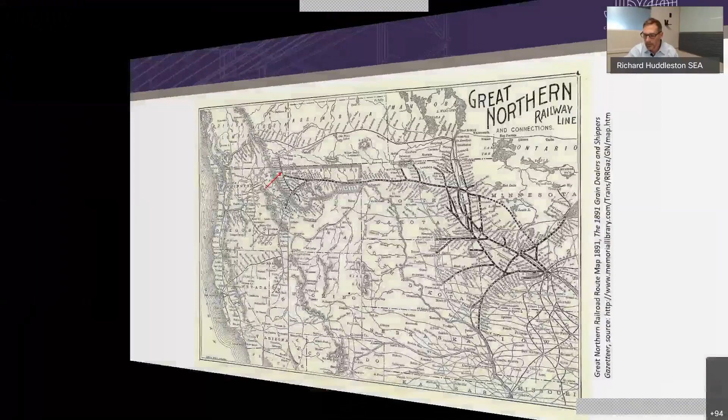Glacier National Park is in the northwest corner of Montana. It's on the east side where it's sparsely populated, and very close to the Canadian border. I remember being up there and the only thing I could get on the radio was hockey games. And the big acreage to the east of the park is the Blackfeet Nation, the Blackfeet Indian Reservation.

Within the park, Many Glacier is on the east side, which sees many fewer tourists than the west side does. The yellow line bisecting the park in two is the Continental Divide.

One can get there over the Going to the Sun Road, which is very much like Trail Ridge Road. It's not for the faint of heart. Or one can drive around the park to the south and enter from the east side, which is what we normally did because we were doing our site visits in the shoulder season. The hotel's at about 4,900 feet, and Logan Pass at the top of the divide is 6,600 feet.

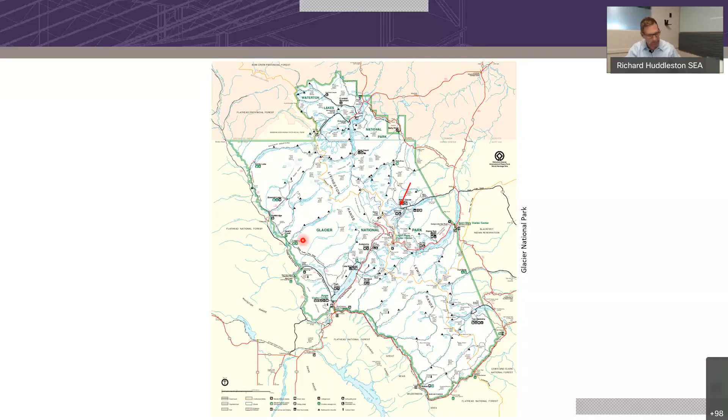Hang on, things are popping up on the screen.

Here's a plan view to get the engineers oriented. North is to the left, and the kitchen and dining, employee areas, and the shops are on the left. Can you all see my mouse? Okay.

In the middle in beige, the T-shaped section is Annex 1. The iconic lobby is just to the south of the annex, and then on the far south end is the second guest room wing, called Annex 2. The lake is to the west or south, and the hillside goes up to the east.

The hotel is about 140,000 square feet. It's timber, log, dimension wood framing, and the foundations and chimneys are stone masonry. Most parts of the building are 4 stories with a fifth walkout level at the basement on the lakeside. And there's balconies on all sides of the hotel.

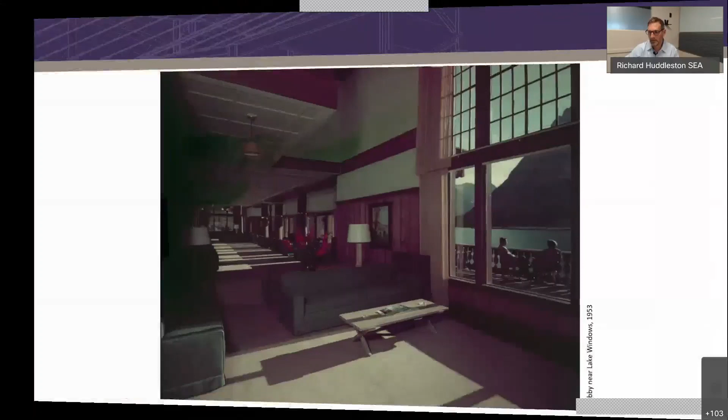And then here's the lobby. It's a 4-story space with an atrium. Those logs travel from the roof framing all the way into the basement, which is below the level you're seeing. Here's another look at the lobby. At some point in the 50s it was updated, it kind of reminds me of a set for a Sean Connery, James Bond type movie.

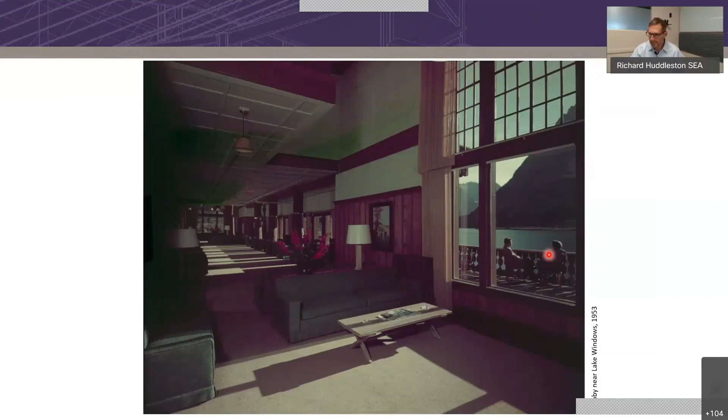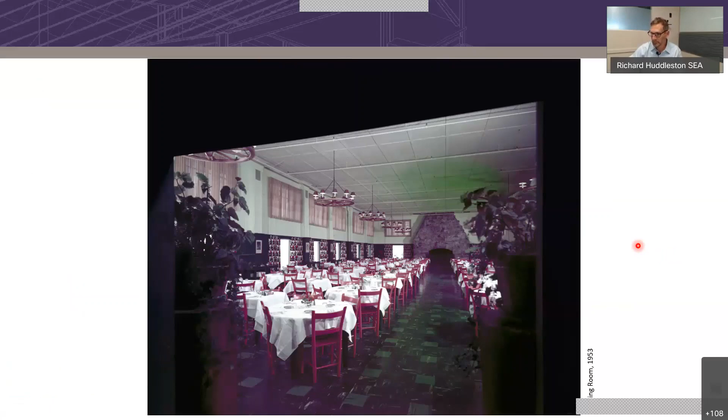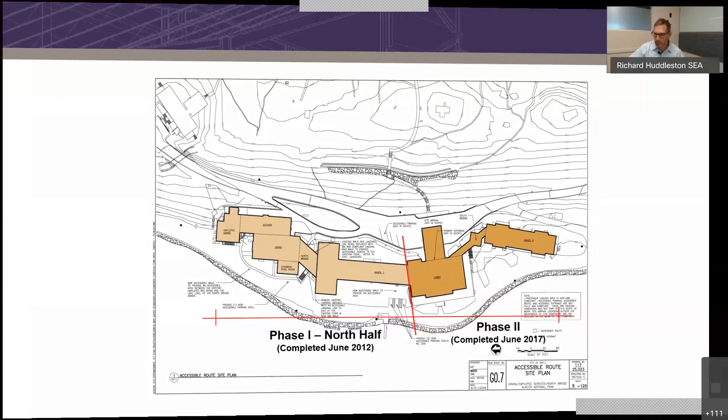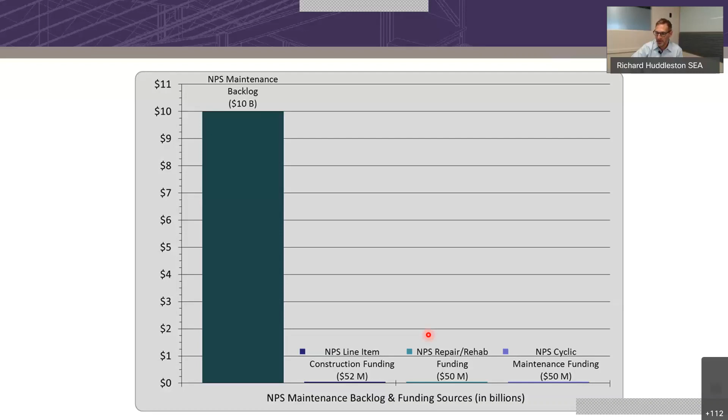This is a great slide. This particular graphic is probably 10 years old, but it's staggering. The backlog in the Park Service is about $10 billion. The available funding per year is on the order of 150 million. So it's not that easy to get funding for a project like this. There's great buildings like the Many Glacier Hotel in many of the parks. Many of them need help, and for that reason, sometimes these projects are phased and they move a little bit slower than you might be used to.

So the whole design team was led by Anderson Hallas, and they worked with the park, and the park worked with the people in Washington to make a case to get this project off the ground. The trick of it, and it was a great idea, was it was positioned as a life safety project, and that helped prioritize it higher than other projects in the queue. Once it gained attention and was going to be funded for these serious life safety issues - the faulty knob and tube wiring, the structural issues, dead-end corridors, fire suppression - those kinds of things, Anderson Hallas said, oh by the way, when we do all this work, let's reinstate all the historic finishes that were lost over the years.

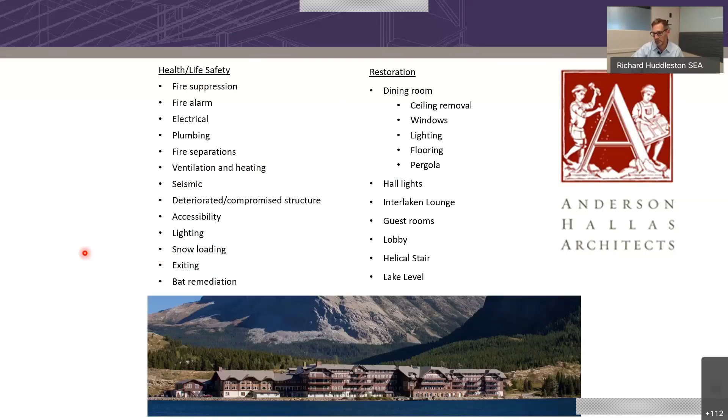Here's some more slides we'll go through pretty quickly. These were all something we thought about as we did the design, prepared the drawings. It's not quite like a normal project because of the handful of constraints.

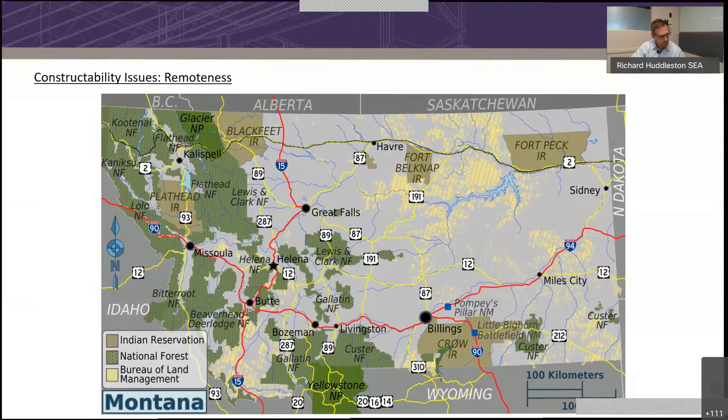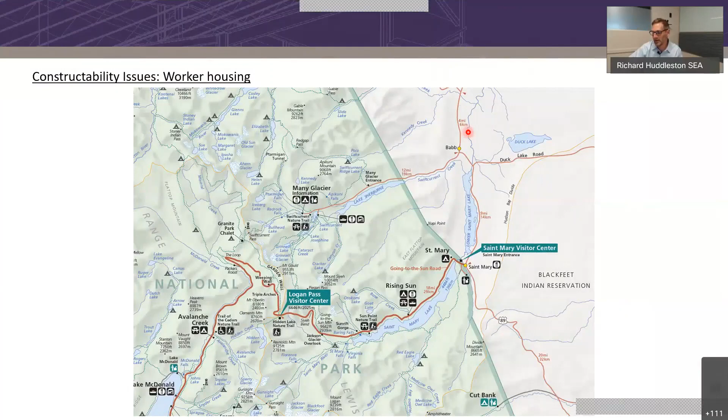We talked about the location before - up here, right near Canada, about 3 hours from Kalispell and 3 hours from Great Falls, which are the biggest cities where you can get supplies and labor. The reservation here is just outside the park. This entire area is very sparsely populated, limited housing, hardly any hotels. Most of the construction crew either had a long commute or they stayed in trailers around Babb.

The park snowed in during the winter, and it's also closed. This part of the park is closed for wildlife migration—there are wolverines that travel from Canada and pass through right near Swiftcurrent Lake.

I don't think I've mentioned it yet, but the hotel was open the entire time we did the project. I should say it was open during its normal guest season, which is in the summer.

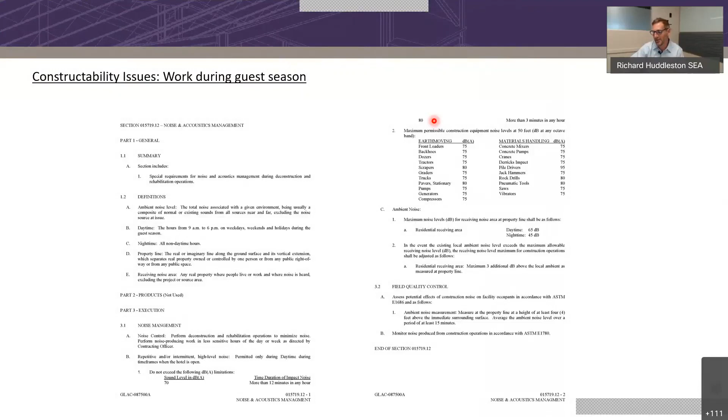This is a snapshot out of the spec book defining the types of noises affiliated with construction, like backhoes and jackhammers, and it states an allowable decibel level for those activities, whether day or night.

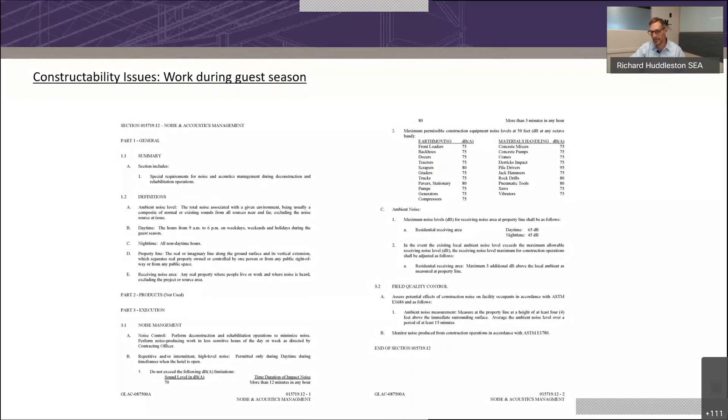Each construction phase of the project required a new drawing sheet in terms of staging, parking, and whatnot for construction.

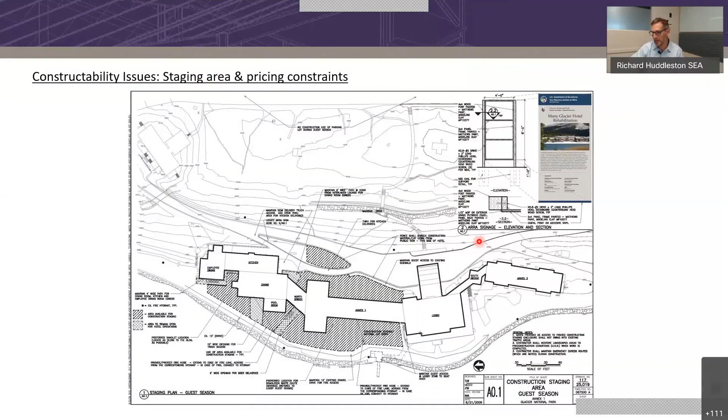Okay, here we go. Three things we're looking at: deteriorated gravity systems, overstressed gravity systems, and the lateral force system. These are sort of miniature case studies, so to speak, as we continue in the presentation.

I'm going a little quickly because I see I'm taking a lot of time.

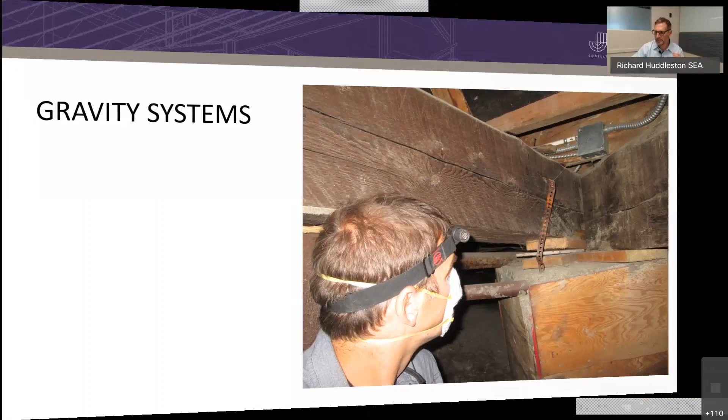One of the biggest deterioration issues was deteriorated basement level floor framing. It was a walkout basement, remember, and snow melt was running under the building. It was a very shallow crawl space. Over the years, as systems were replaced, there were lots of notched joists and studs, that sort of thing.

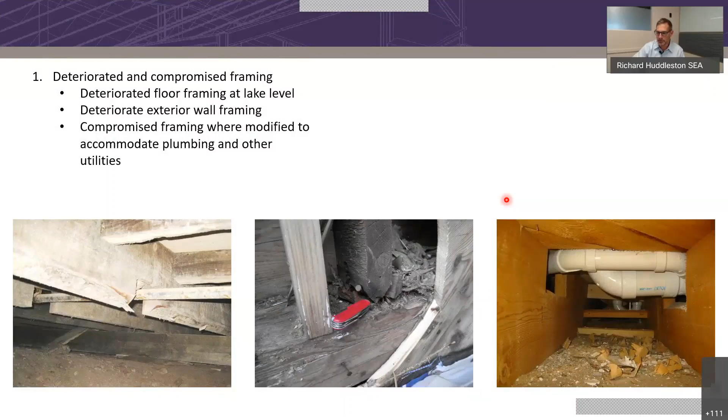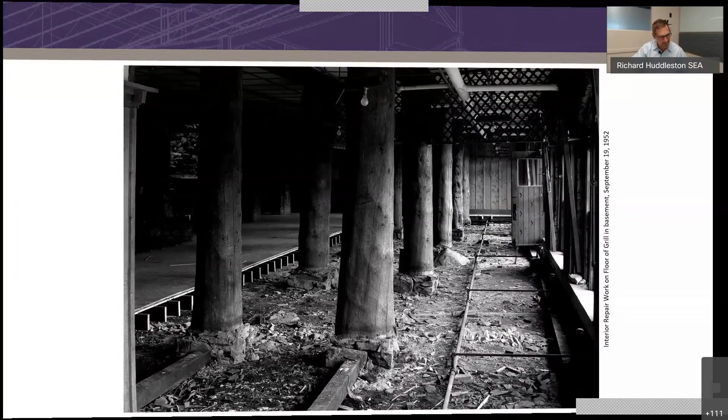We had some pictures that helped us decide where to look. These are the types of things we found—soils that had migrated in the crawl space. You can see that that's a broken girder.

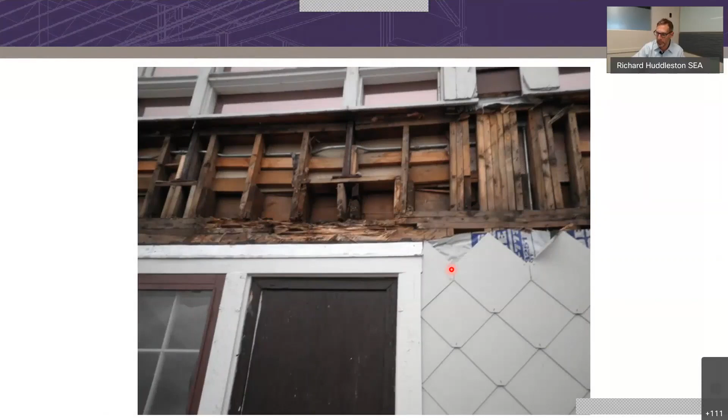This was a sort of unpredicted discovery, deteriorated wall framing. We thought that was covered in the previous siding project.

Once we had a handle on the issues, we had to come up with the repairs, and there were two types, so condition specific. This is one particular beam—if you can see the belly in it, and some dry rot at the end. So we sistered it up, epoxied the end, and put a prop in.

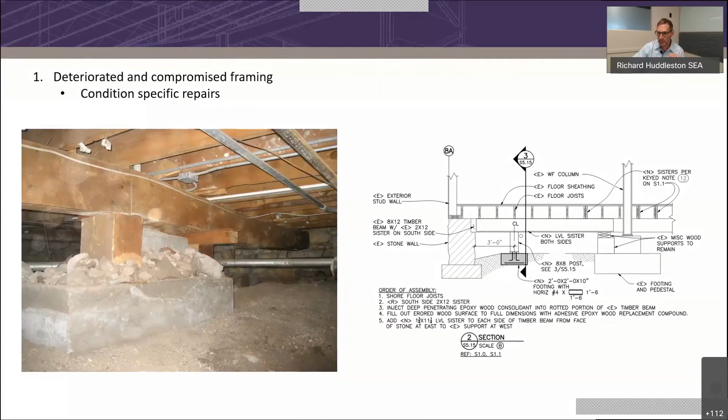A lot of our gravity work was more prescriptive, so we gave guidelines to the contractor on how to deal with notched framing—what requires headers, what requires sisters, what requires replacements.

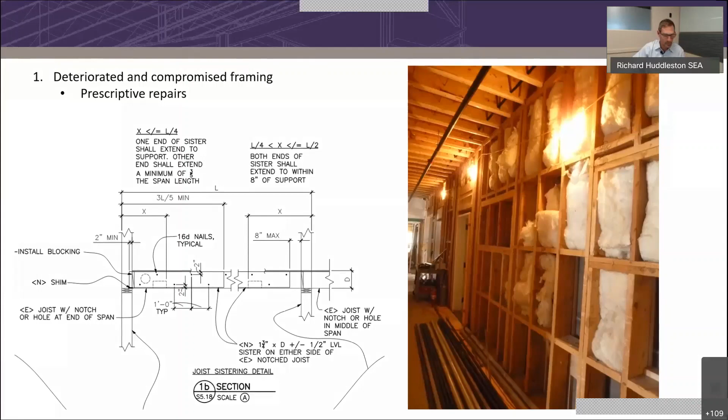We also made a plan for all the new utilities. In this particular photo, we've got furring strips where the electricals run, plumbing going through the acceptable holes in joists, and the fire suppression was dropped below the ceilings.

These stud packs, and even the mullions, were significantly undersized for wind loading.

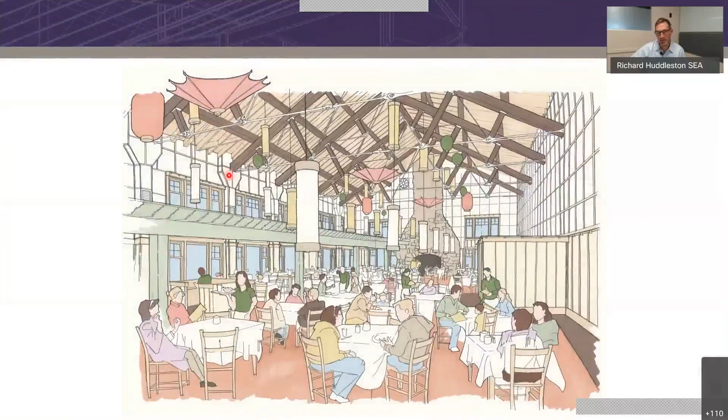So here's that dining room again—this is what it looked like when we started the project. This was the vision that Anderson Hallas came up with. This is what we had in terms of existing documentation.

In terms of the roof framing for this particular part of the building, the trusses calced out, and all we really did was add intermediate purlins between the existing purlins.

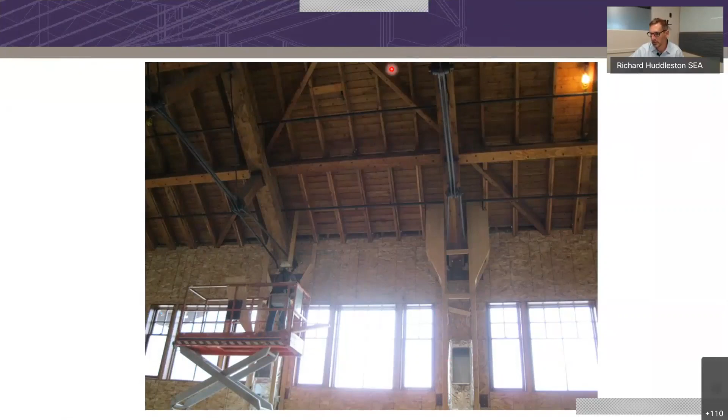Here's the dining room when it was all done on the outside, and this very much resembles the historic photo, if you remember from the very beginning.

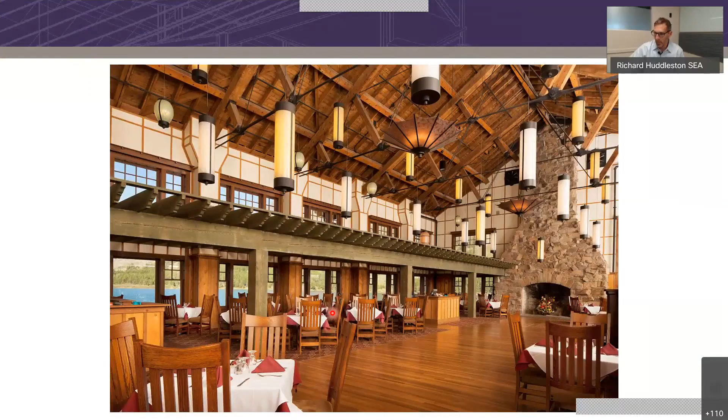Here's another case study related to the gravity system. And I should mention the design load too. There's no building department to call and ask what the snow load is, so the National Park Service had done a snow study for the park and indicated a ground snow load of 180. By the time we took the reductions for slope, and we actually had a lower importance factor because the building's unoccupied in the winter, it was around 130 pounds a square foot. This tied and propped rafter system didn't figure, so we added some additional props down to our bearing walls.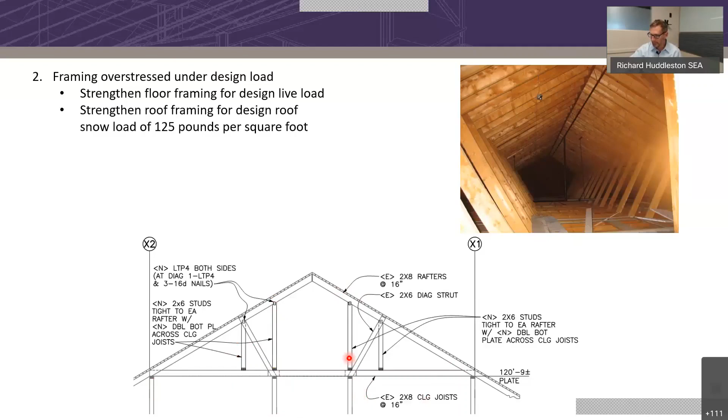And this is what it looked like when we were done. You'll see later that the corridor wall was a shear wall, so we're extending those shear walls up to the roof diaphragm to pick up load. Here's a collector in the area on the outboard of the shear wall.

I hope I'm not going too fast, everyone. I just want to make sure we have time for Brett's part, which is really interesting.

So Irina asked that we talk a little bit about code compliance, and I thought maybe we'd pause here before we switch from the gravity system to the lateral system and just talk a little bit about code compliance for this project.

There's a few points I wanted to make. The first is with the National Park Service, the authority having jurisdiction is actually the U.S. government, and the Park Service has structural engineers on staff. So along the way, we're collaborating with the Park Service on what the appropriate loads are and what the appropriate approaches are, and what the right code interpretations are.

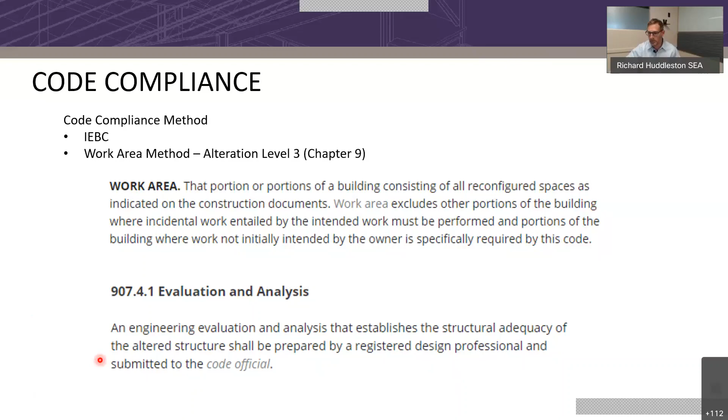Okay, bear with me, another one of those things popped up. I'm going to do what Richard showed me. Here we go. Getting the hang of it.

A few more points about code compliance. I think the park's perspective was this: it was basically a once-in-a-lifetime project, they were putting a lot of money into it, and in a lot of ways it was a gut. A lot of the finishes were moved, so they'd asked that we bring all the systems up to current code. And by and large, that's what we did.

There was an exception, and that was the lateral system for the lobby. It has an open floor plan, and it's an iconic, almost sacred space, where we couldn't put frames. So the only way we could really get there was to use 75% of the lateral forces, which is permissible per the IEBC in the case where it's a voluntary seismic upgrade.

And then for whatever young engineers are on the call today, I thought it'd be worth pointing out my perspective, which is this: I think the right thing to do is figure out what the building's doing and what it needs, come up with the right answer, and then look to the code to see how you can make that judgment work and be code compliant.

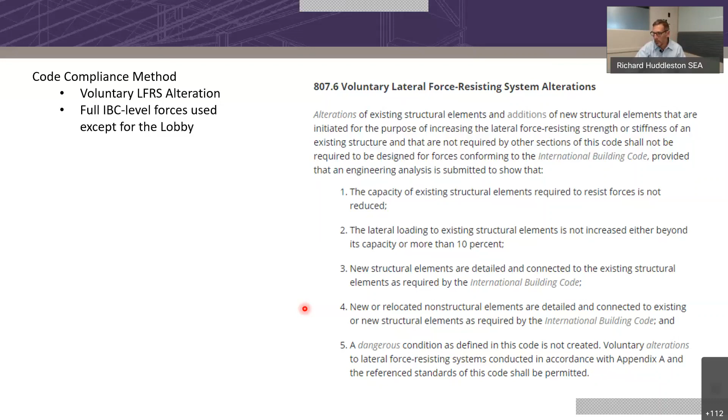Okay, here's the introduction to the lateral system part of it. And this was probably 75% of our work, if not more. We treated each section of the building separately, and that was really just due to the fact that they were all built differently.

An interesting thing in the guest rooms was there was a number of partitions that roughly stacked from floor to floor. But they were surfaced with something called Sacket board, which was a precursor to gypsum board. We did some research on that material and learned that it was brittle and failed quickly, not with ductility. Then during some of our probing and investigation, we learned that those walls in the guest rooms actually didn't stack exactly from floor to floor—they were just roughly stacked. So it became a challenge to justify what was there.

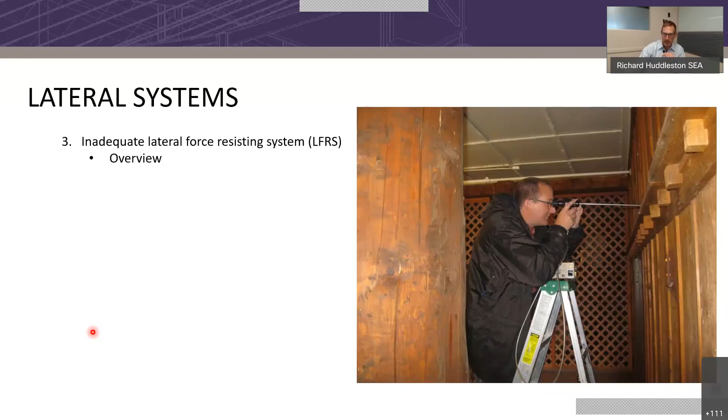And you'll see we introduced a new lateral system.

Here's a couple facts that are interesting. So just on the north half of the building, the first phase, we introduced a total of 22 new lines of resistance, or shear walls, or frames, because everything that was there originally was not specifically designed for that purpose. Again, it was empirical. And then to put another point of perspective, this chimney is about 50 feet tall and weighs close to 500,000 pounds. So if you do the math on the seismic, it's pretty big forces we were dealing with.

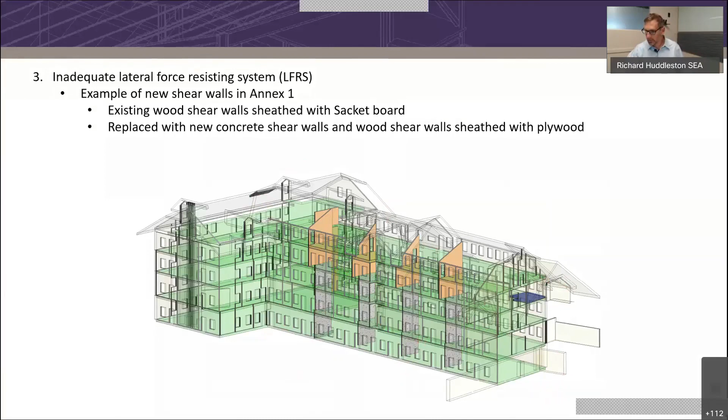This particular section was actually governed by wind. It's all wood framed and it doesn't have much masonry. But what we found was quite a bit of load accumulates in a 5-story building, and our aspect ratios were fairly unfavorable. So here are these 4 walls in the plan view.

And then we strengthened from the inside on the end wall. And then the corridor wall became our shear wall. And then we gave some credit to the exterior walls that had diagonal sheathing on them.

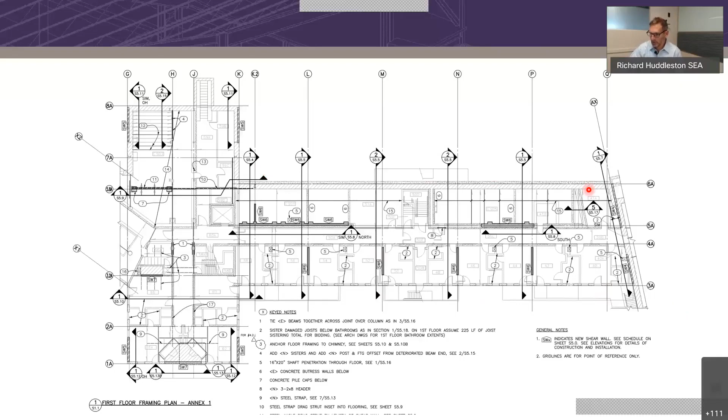And a previous emergency stabilization measure had put these retaining walls in, and then there's some counterforts here that really made it hard for us to get shear walls on this side of the corridor. It was just too congested in this crawl space.

So we picked the far side. There's a doorway, and then we have a lot of utilities running through this little gap between the end of the shear wall and the corridor wall.

Lo and behold, we could only get the upper stories to work in wood, and then we transitioned to reinforced concrete. It's like a 5 or 6 to 1 aspect ratio. And then, as you'd imagine, the tension forces get pretty big at the bottom.

So for this wing, we're using micropiles to resolve the tension loads at the end of our shear wall.

Even the wood shear walls have some hardware that's a little bit more than I was ever used to dealing with. Some of these are double 6x6 studs with the Simpson high strength anchor rods that tie full height.

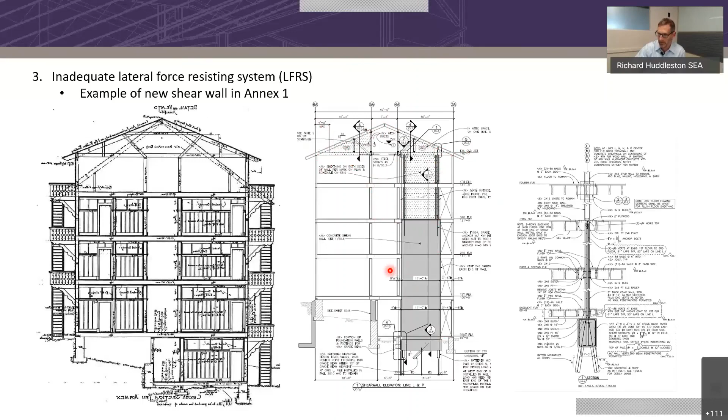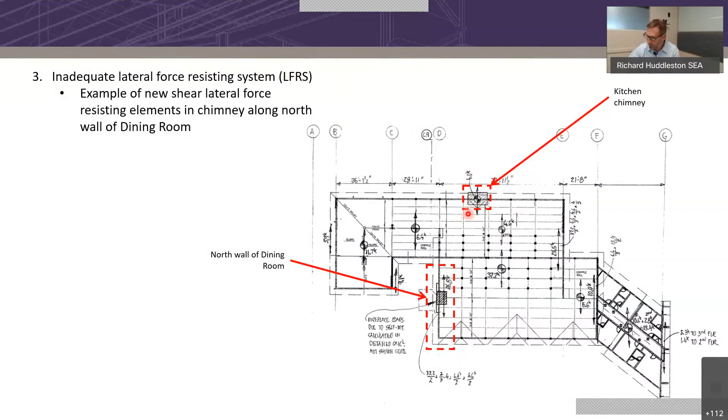This shed was removed so that visitors could see the chimney from top to bottom. Here's one of the two flues in that chimney.

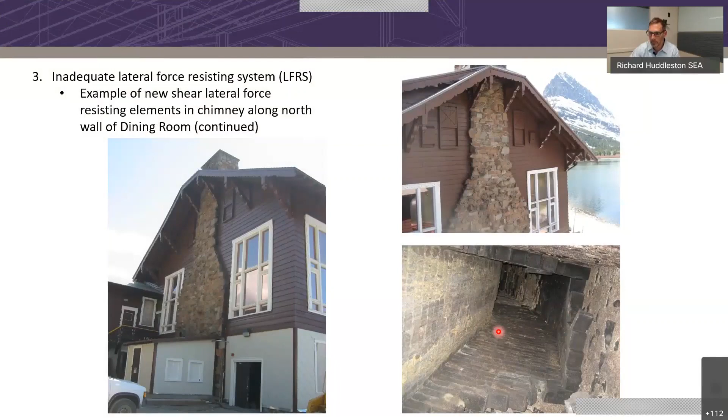Here's what it looks like in the existing drawing, and here's what Dan came up with. This flue served an abandoned boiler in the lower level, which is where the shop was, and the dining room is up here. Of course, everyone wanted to keep this flue operational for the guest experience.

So this flue was abandoned and recruited to be part of our lateral system. It's reinforced and grouted. There's some stone demo to access the opening, and on the opposing side, the stones were labeled and deconstructed.

Then this reinforced concrete shoulder and chord was installed, and it was refaced with stone. So in terms of the lateral system, this became a shear wall in plane, and out of plane where it's much more slender. The diaphragms collect the load and distribute it downstream to other shear walls.

This is a duplicate, but this is more of that strengthening work around the windows.

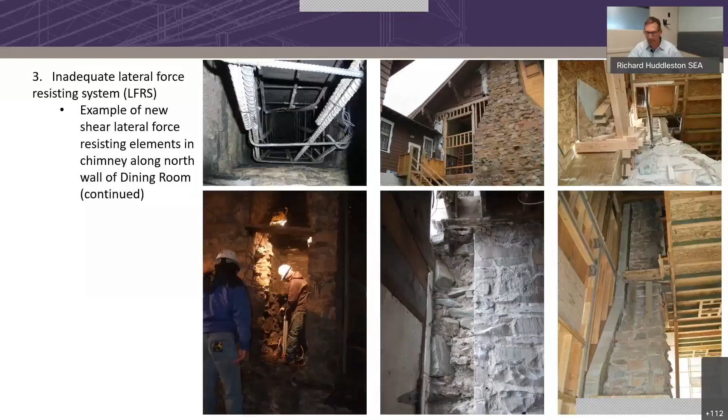There's plumbing and utilities everywhere in this hotel, and while they were mostly being removed, they were in the way of assessing things. A lot of the framing had been modified because of them, and in the new design we had to find chases for all these things. These are the reframed exterior balconies I mentioned before. This is a stone masonry chimney that was shotcreted, yet another interference to deal with.

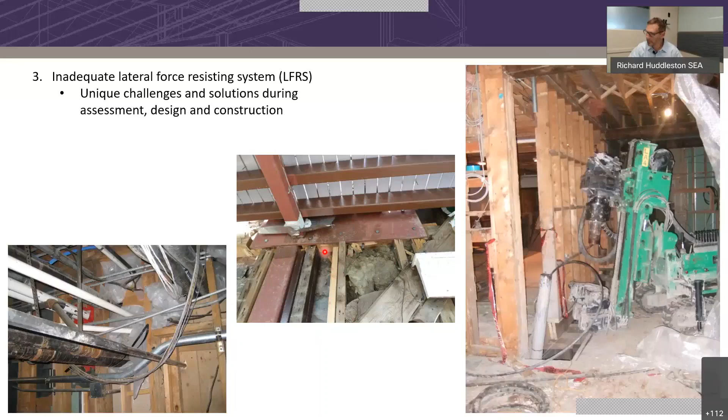I think that's it for me, and next up is Brett.

Thanks for bearing with me. I was a little bit nervous, but I'm feeling better now. And then when Brett's done, I'll come back and wrap it up, and then we'll do questions. Yeah, okay.

All right, thanks, Ian. As I'm sure you can see, he's the brains behind the operation, really. He's been involved from the beginning due to retirements and some of the senior guys going on strike in that first phase. They needed replacement engineers, so that's kind of what I am, the scab engineer.

He tempted me in with promises of these amazing site visits, you know, pristine, beautiful environment. He followed through 100% on that. It is really an amazing place, an amazing location, and it's beautiful that it got saved. He did not mention that they turn off all the plumbing in the winter when we were there doing our site visits, so the nearest toilet was a vault toilet, a quarter-mile or so away across very cold, mountain goat infested parking lots. But I've forgiven him for that.

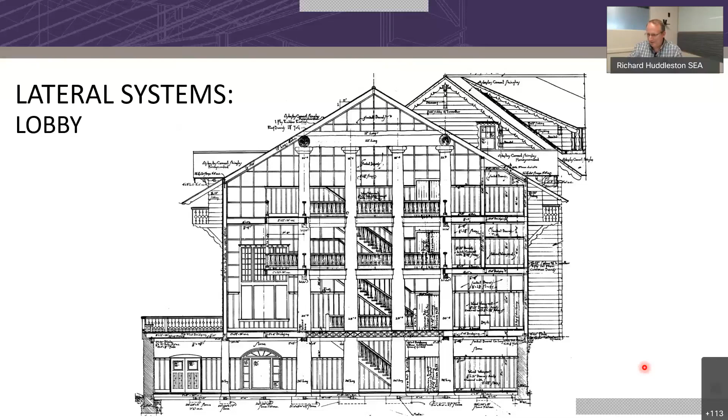So I'm going to go to the next slide, which is a cross-section roughly through the same area that we did after I got involved, and you can kind of see some of the difficulties. The big atrium in the middle was laterally very difficult. Shear walls, or walls we could use as shear walls, coming down to joists. Even the exterior of the building on two of the sides didn't go all the way to foundation; it came down to rows of log columns.

As Ian mentioned, we were working with 180 PSF ground snow load, seismic design category C. I'm not aware of any earthquakes in the vicinity of Many Glacier, but there have been on the west side of the park. In 2017, there was a 5.8 magnitude. So even though it hasn't hit there, it is a real concern and a real issue.

You can see, similar to what Ian was saying earlier, that we have a lake level down here, basically a walkout basement retaining on the mountainside and then opening out to Swiftcurrent Lake. And then there's the lobby level, which is really open.

Not a lot of walls, not a lot of continuity there for us. There's two full levels of guest rooms, and then there's a fourth level in a couple locations of small staff rooms, tucked up into the rafters. And then, of course, the roof, which was talked about earlier and will be discussed a bit later.

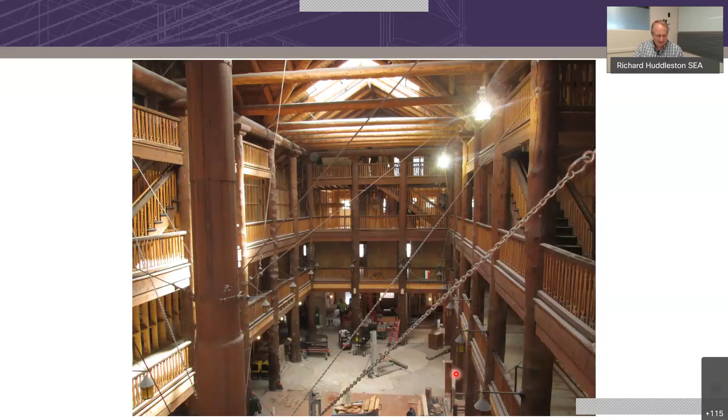And when we built this model and started running it, honestly, it didn't run well with existing loads. There were instabilities, deflection problems, and members, especially in the floor framing, that were just overstressed and didn't have capacity for modern design codes. And the renovation in the 1950s really didn't help—it made things worse.

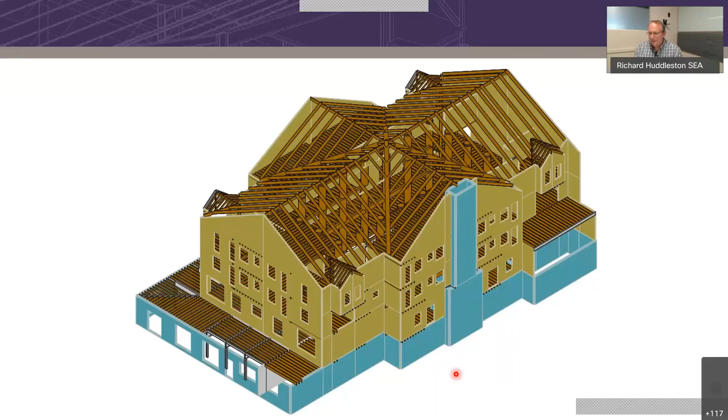And as mentioned, there really wasn't a discernible lateral system design. It was empirical, and even empirically it had some challenges. I'm guessing it's been close to that 180 PSF ground snow load multiple times during the park's history—you've seen the pictures of the building retaining snow. Likewise, it's probably been pretty close to its wind loads and it hasn't fallen down, so there's some redundancy there. We couldn't get it to calculate cleanly, so there's no doubt some structural help from pipes, ducts, and conduit in the building.

So our primary focus was to strengthen the lateral system. At the same time, we took care of a lot of the life safety things for gravity loads, but the primary focus was the lateral system. And everything was negotiated—there wasn't a lot that was permitted by the combination of the National Park Service, the architect, the State Historic Preservation Officer, and also the budget.

I know a similarly constructed project at Yellowstone several years ago, with a bigger budget and granted higher seismicity, actually shored up the building, took out the logs, hollowed them out, and used those to clad a structural steel moment frame system—but that just wasn't in reach for us. So in the end, for the lateral system, it wasn't about getting it to current code, it was about what we could get it to within the parameters we had.

Starting with the diaphragms, going to collectors and chords, all the way down to foundations - how much can we strengthen them, how much can we improve them, and at the end of the day, what does that get us? As Ian mentioned, at least 75% at our worst point of current seismic loadings.

Normally, I wouldn't be very happy with that. That doesn't give me a warm and fuzzy feeling.

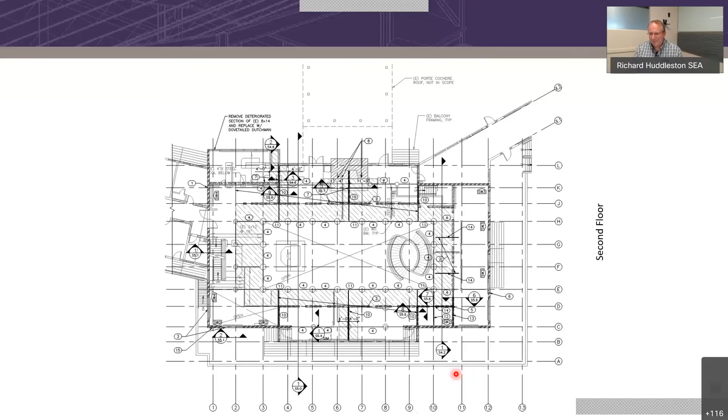And we added blocking - miles and miles of blocking. The contractor had laborers who, that's what they did for weeks on end, was cut blocking, and other laborers who installed it. They must have really hated me. But that may be a theme of their labors throughout this project.

We also had similar issues of repairing floor joists as different trades had come through and blown holes or completely removed sections of joist - similar to what Ian had talked about.

There's a part of this project, a part of the hotel that they used to call Stagger Alley. It came off of the lake level of the lobby and then went into Annex 1. The lake level lobby was where cocktails were served, and dinner and dancing and that sort of thing. So part of it was perhaps some guests were inebriated as they made their way back to their rooms, but it really wasn't their fault - it was from some of those factors that Ian mentioned earlier. The floors had cross slopes that perhaps you might not expect.

And then in the second and third levels here, we had our own little Stagger Alley. In the 1950s, as part of the renovations, they removed some columns and tried to strengthen some of the existing structure, making room for a gift shop in the lobby. But the members just weren't stiff enough - they weren't strong enough.

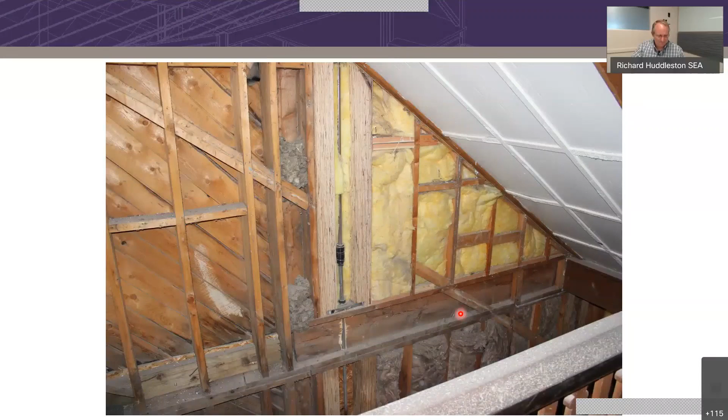Just a couple quick photos from some of the things we've been talking about. I'm sure this looks familiar to all of you, but we're connecting our shear walls from level to level. Each one of those details is different, it seemed like, everywhere in the project, because each had slightly different existing construction. That's a close-up of the hardware—as Ian described, it's stiffer and heavier than what we normally see around here, but more typical in other parts of the country.

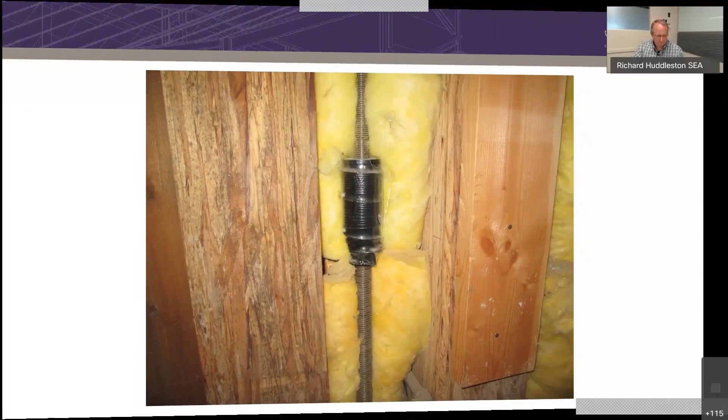As I mentioned earlier, we could sheathe both the top and, in most locations, the bottom, although we had to be careful that the bottom didn't create discontinuities in the ceiling line that would be noticeable. So that takes us down to the lobby level, and that's where things start to get a little more exciting.

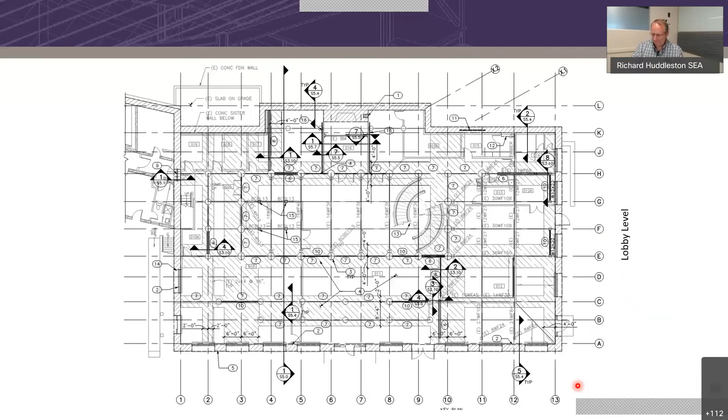I mentioned earlier that we had a bit of a surprise in the columns not being continuous from rafter down to foundation. They were cut within the depth of the floor structure at the lobby level, so we had basically no continuity between above and below. In some places, we actually had to add yet more blocking to give the upper columns adequate bearing.

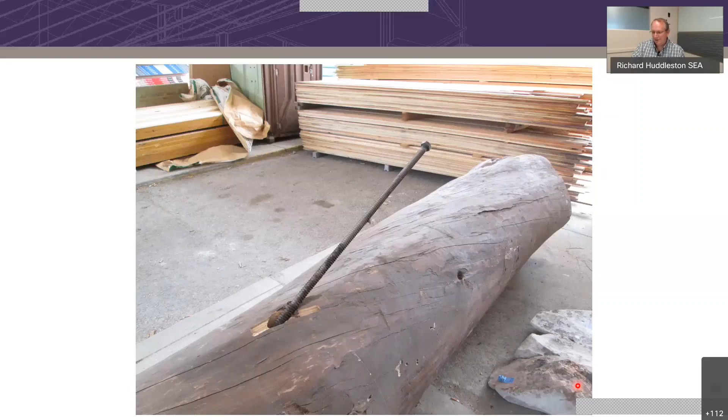And they wouldn't let us have anything visible at the lobby level. It was completely off the table. They did let us strengthen and add some collars at the lake level, and from those we ended up working with Portland Bolt to get some custom lag bolts made, and the contractor made some jigs and was able to lag up through and connect the two columns for the loads we were anticipating.

You can imagine as part of that, we were trying to, as hard as we could, get the loads from that lobby level diaphragm down to foundation as many other ways as we possibly could. So we ended up strengthening a lot of the beams as well, but always above the finished material or in unobtrusive ways that the architect found acceptable.

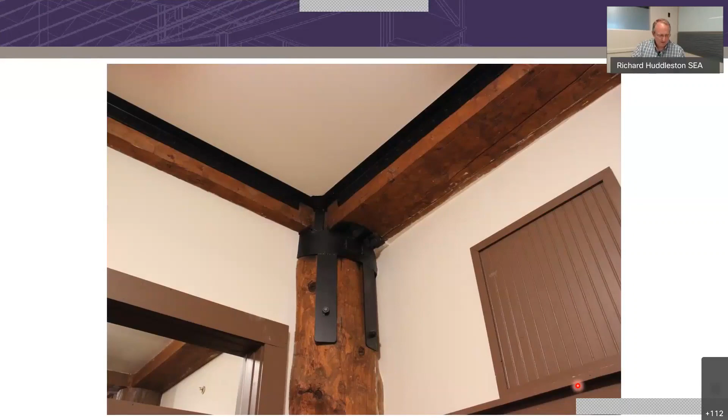So down here at the lake level, we were allowed to put in some concrete shear walls in unobtrusive places - up here by a restroom core, over here by where they were relocating a cafe. And they also let us put in a couple of steel X braces here, here, here, and then over there.

The other challenges we had here is, as Ian mentioned, there was a lot of groundwater movement going underneath the framed wood floor. In the 1950s addition, when they had been playing around with some of the columns, they put them on concrete foundations. Many of the others were still on the original stacked stone foundations.

In the end, the Park Service decided to replace the framed wooden floor here with a concrete slab on compacted gravel with a bunch of drain lines going underneath it. So we protected the bases of the columns as best we could.

At the time of our investigations, they wouldn't let us do any kind of destructive testing of the log columns. So we just had to note that during construction, the contractor needed to do some demolition, see the condition, see how bad it was, and see what we needed to do to fix it.

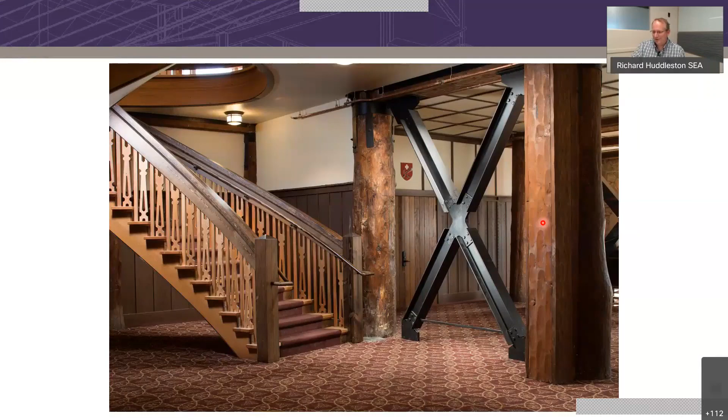So after they started construction, sure enough, we had rot in about a half dozen of the logs. So we sent one of our engineers, he was a young engineer then, he's now of course old and mature, Ty. He spent a couple days with a piece of equipment called a resistograph that's part of Ian's box of tricks, and it measured the torque differences as we drilled some pilot holes through these logs. Based on the graph of the resistograph, we could determine the extent and location of the rot.

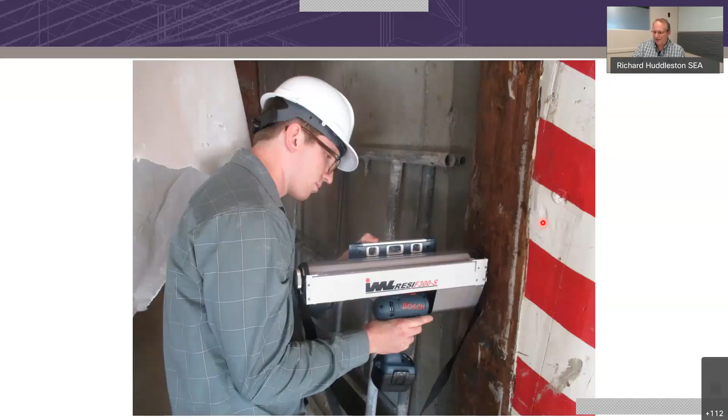And with those four that we had to remove, that's one of them. You can see that's rot. And it was primarily in those logs that had been founded on these concrete pieces during the 1950s.

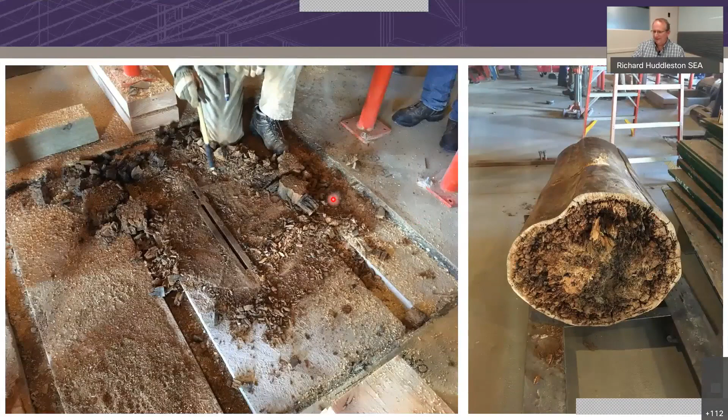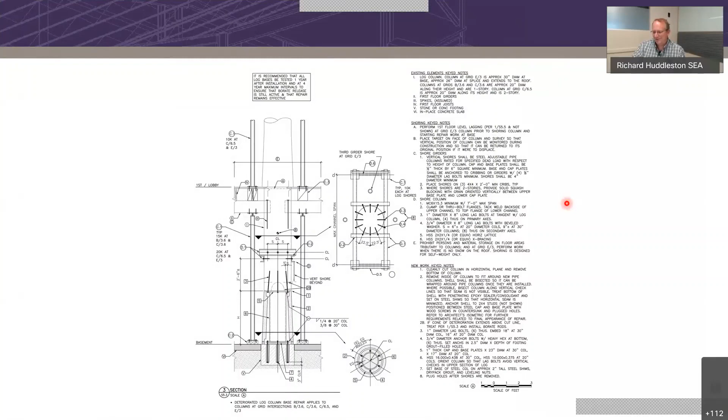So we ended up having to shore those individual columns up, and with a chainsaw we removed the rotten part, hollowed it out, and then replaced the rotten part with a steel post, and took the shell of the wood, which was still good, and clad it, and it really turned out pretty well. If you're looking for it, you can find it, but if you're not looking for it, you won't know it's there. So there's one of the posts coming in.

There were 2 chimneys in the lobby. One was a metal chimney, which obviously wasn't really an issue, but the massive stone chimney by the front desk had fireplaces at the lake level and the lobby level, and they wanted to keep the lobby level flue operational for the guest experience.

They weren't as concerned about the lake level, so they allowed us to reinforce and grout that one. Second floor and up, we still had to tie off to the floor diaphragms at each level and transfer those loads into the diaphragm and through the structure. At the lobby and lake level, it was massive enough that we also ended up, similar to the dining area chimney, drilling and grouting holes then recovering with the facing stones.

During construction, the grouter got a little bit ambitious with his lifts, and we actually had a blowout between the second and third levels, but fortunately all of the shoring and protection was in place. Nobody was hurt. It was just a wall that had to be rebuilt, and there was a lot of cussing involved.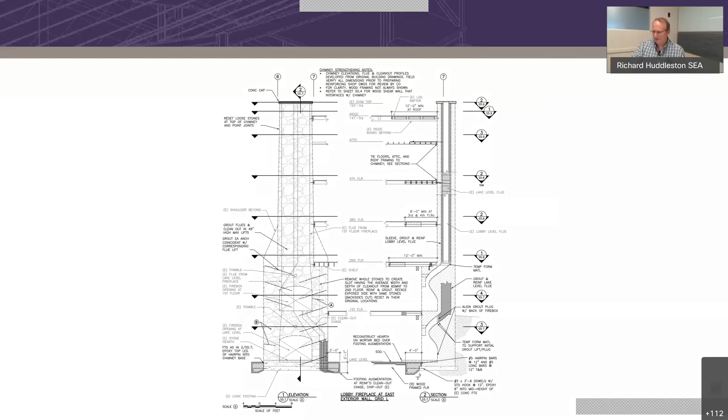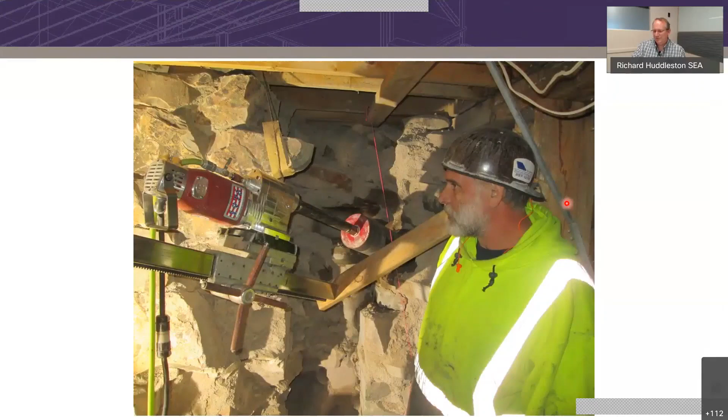There's a picture of them drilling into the chimney to be able to reinforce and grout that to strengthen it. So this is the finished product.

And then this is the bottom of those spiral staircases, which again are just beautiful, and I was really happy and proud to be a part of that.

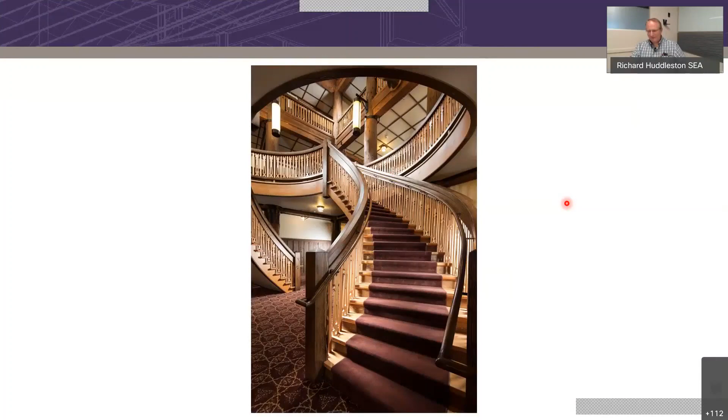So now I'm going to give the time back to Ian, and he'll wrap a few odds and ends up, but thank you for your time.

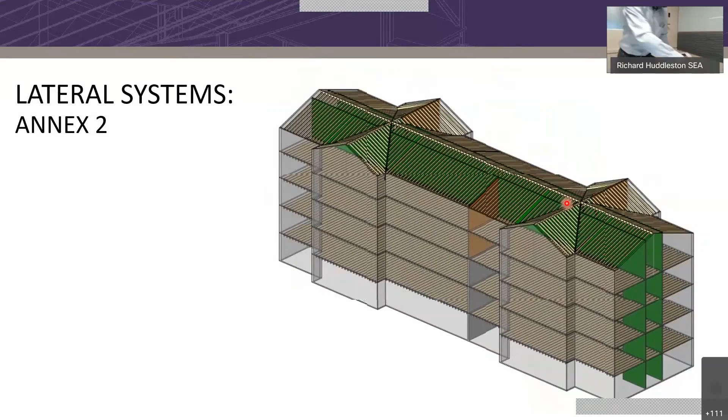Obviously this could be a longer program, so I'll go quickly here at the end. If anybody's curious about anything we kind of glossed over, I'm happy to talk about it later. It's been fun to refresh my memory on this project over the past week, getting ready for today. Let me go through the end quickly and make sure we have time for questions while everyone's on the call. I'll try to highlight what's most interesting, and what might be a lesson learned for any younger engineers on the call.

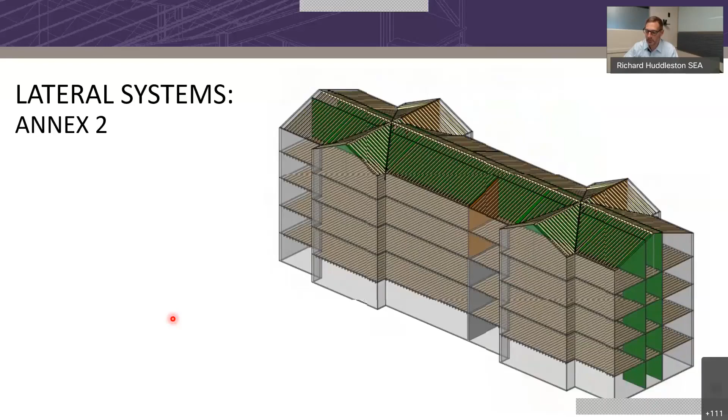Annex 2 is the one down at the south end. It was the last part of the hotel that was built. Christine did the design, very similar to Annex 1. Let me just point out what's different: it had 4 chimneys, serving, but they weren't visible, they were furred out and plastered.

They were utilitarian. And as Brent said, on this second phase we were very, very much budget constrained, so we elected to take this seismic mass out of the building and remove those chimneys. It greatly reduces what forces we have to deal with. And the tops of those chimneys had already been lopped off in the attic, so it really wasn't a loss of historic fabric, or at least historic fabric that people can see.

The other thing that's different and interesting are these bump outs at the cross gables. Something I learned in one of those WoodWorks seminars from a fellow named Terry: you want to have your chord at the same line. So these black lines indicate a chord we're introducing with steel strapping and blocking, so it behaves like a diaphragm without irregularities.

Keynote 9 here are drags. Again, we're trying to respect the capacity of the existing diaphragm, which thankfully was diagonally sheathed, so we get a pretty good number for that. The floors were diagonally sheathed. The roof was horizontally sheathed, but that roofing project had put a thin layer of panel sheathing on top, so we had decent diaphragms to work with.

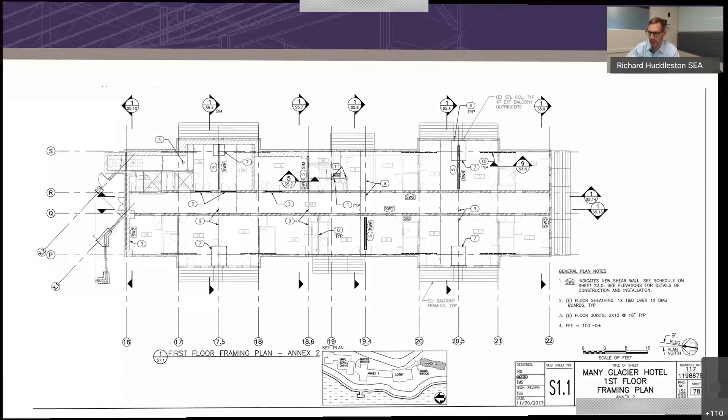Sheathing a shear wall on the interior is easier said than done. This is the simplest of all the details we came up with, where we basically transfer our shear through some extra blocks or plates through the rim and then down into the next level. There were dozens and dozens of iterations of stuff like this, especially in the lobby.

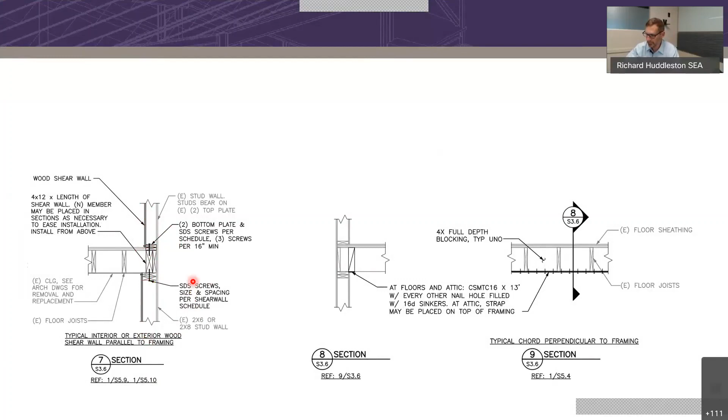For Annex 2, we used both corridors instead of just one. Obviously that's better, and it was also because we reinstated the light wells in each of the rooms, so we had less shear piers to work with. We needed both walls.

Grade beams, shear walls. The chimneys - I think there ended up being 7 or 8 chimneys in total. Each one was treated uniquely.

Brett passed along the biggest lesson learned. Grouting a flue is pretty common practice as a reinforcing strategy. You do have to be very mindful of your lift height because they can blow out on you.

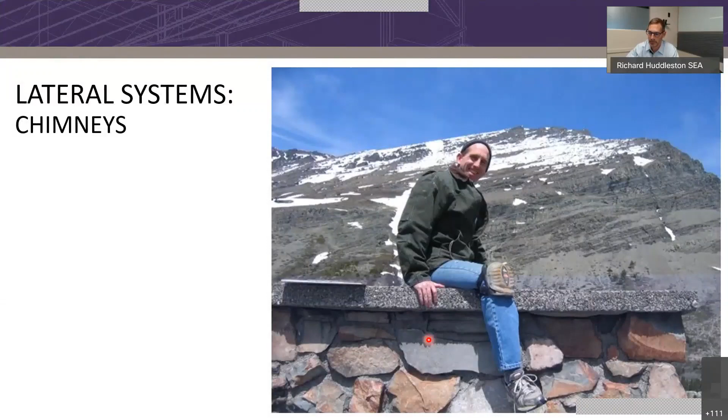This is the one we touched on before, the annex chimney. This was reinforced and shotcreted. It's tied into each diaphragm. In the short direction, it becomes our shear wall. In the long direction, a lot of work in the attic to pick up load off the roof diaphragm, and then micropiles and grade beams.

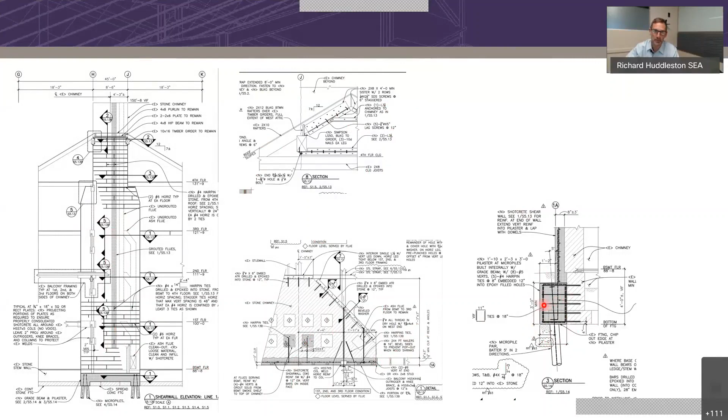The concept was standard. The detail was different at every condition. This one's pretty interesting - the chimney really necks down between the first and second floor. So it's just a skinny square, unreinforced masonry chimney sticking 15 feet out of the roof.

The flue had to remain operational for the Interlaken Lounge. So Dave Hotteshell, if there's any old timers on the call, might know him. He and I came up with this idea.

So this is a steel pipe. We dropped it with a crane into the flue and then grouted the annulus and reinforced it, to give it the ability to act like a flagpole once it cantilevers through the roof diaphragm.

And then that's the kitchen chimney. This is the one you see in the pictures where Dave and Dan are sitting on top. That one was pretty standard, good aspect ratio, and the sort of frightening top of it had been removed before.

Oh, one other thing I forgot to mention - the contractor was called Swank Enterprises. They were out of Montana, and they did the emergency stabilization work before our team was involved. They did phase 1, and like I said, they did it very inexpensively, relatively, and then they won the contract for the second phase.

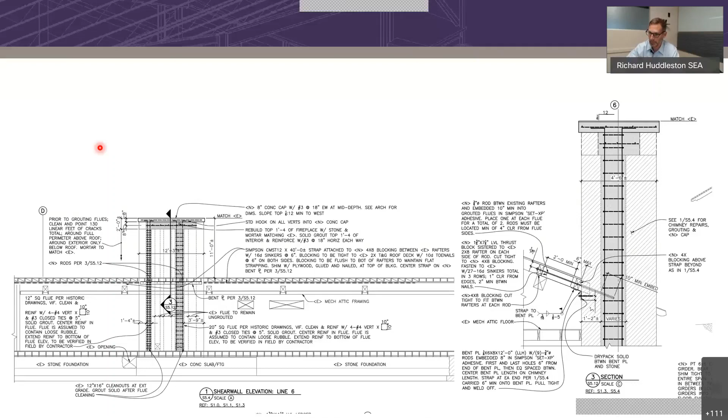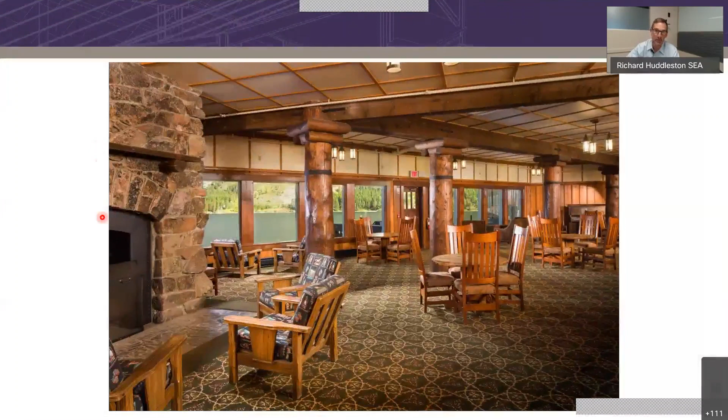This is the Interlaken Lounge when we first started. Here it is when we were done. There's that chimney - it's got the pipe in it at the top. And then this is the photo you see all the time with different lighting conditions.

In closing, I'll say it was a terrific project. The Park Service, I know, was happy with the product. If you visit the hotel, it'd be hard to find any of the structure unless you're really looking for it, with a few exceptions. It was our privilege to work on it, and we're grateful. Thanks for watching the presentation.